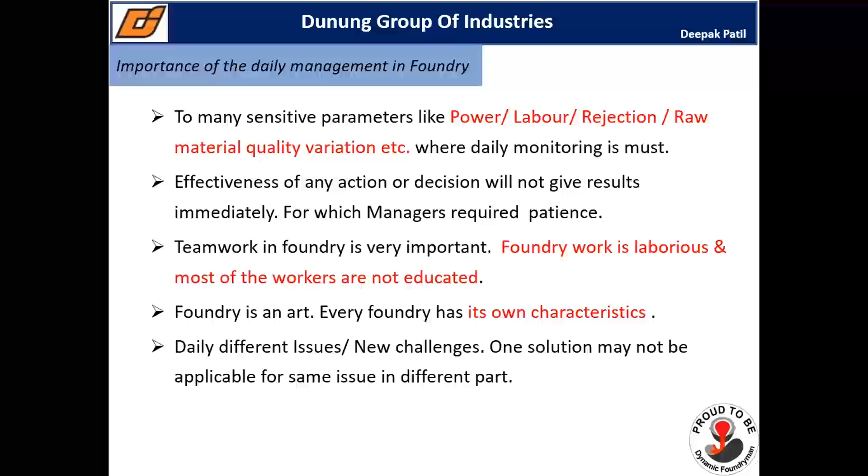From the beginning or foundation of the foundry, it creates its own characteristics, its own systems, which have to be built up on its own. I mean to say that every foundry has to build its own characteristics. It cannot be copy-pasted. And every foundryman knows the different issues or challenges he is going to face every day. Every day is a new day for a foundryman, with new problems and issues that we are going to face in the daily process.

So one of the management criteria is top to bottom and bottom to top. I feel that foundry is bottom to top management, because whatever the skill and whatever the performance of the foundry depends totally on the bottom level management. Bottom level management means the supervisors, engineers, managers.

Whatever the top management skill or performance will not reflect directly in the results, but the capabilities of the bottom level management will show the performance. So this is my perception, that foundry is a bottom to top management. So how to overcome this? We need to understand the small activities, and daily management is the key role in the foundry.

Second part of this, developments and toolings. As we know, for any organization, development activities are very important and crucial. It will build the image of the organization. While talking about foundry development, it includes the pattern, core box, tool developments, because any design issue will impact the overall performance in production. It is going to be run for long production.

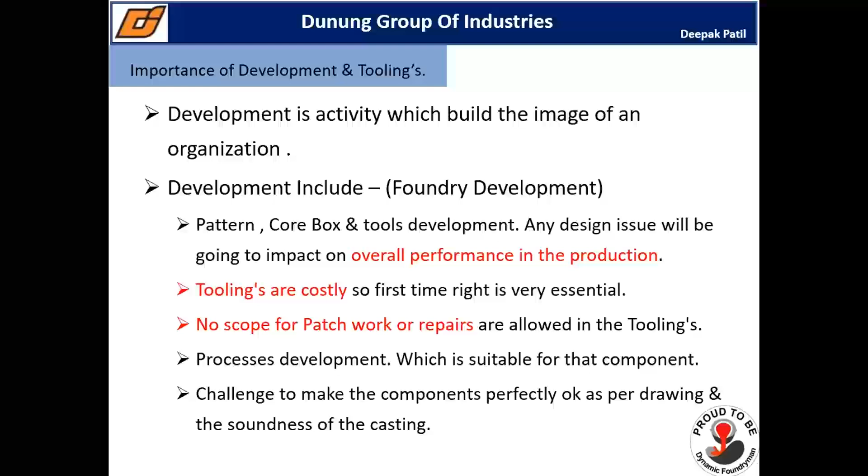So I divided the activities of the development department into 4 categories, and depending upon the organization size and structure, it may vary, there may be additional activities. I divided the development department into 4 activities, and these 4 activities will simultaneously perform their role. Then I will come to the organization structure, how the organization should be.

The first thing is RFQ or new inquiries, that is, request for quotation or new inquiries. These are the inquiries from the customer that the development department needs to study for feasibility with the available plant and machinery. Then product and part development, which includes the manufacturing of patterns and core boxes. Then process development and its documentation.

After manufacturing of the pattern and tooling, one casting sample production is a must. So after manufacturing of the pattern, as a development engineer, we should develop the process and show how the process is proven.

Then after the successful implementation of a sample casting, then the PPAP batch, this product is handed over to the production department. And after this, when all the patterns are working under the production department, the responsibility for maintenance of that tooling lies with the development department.

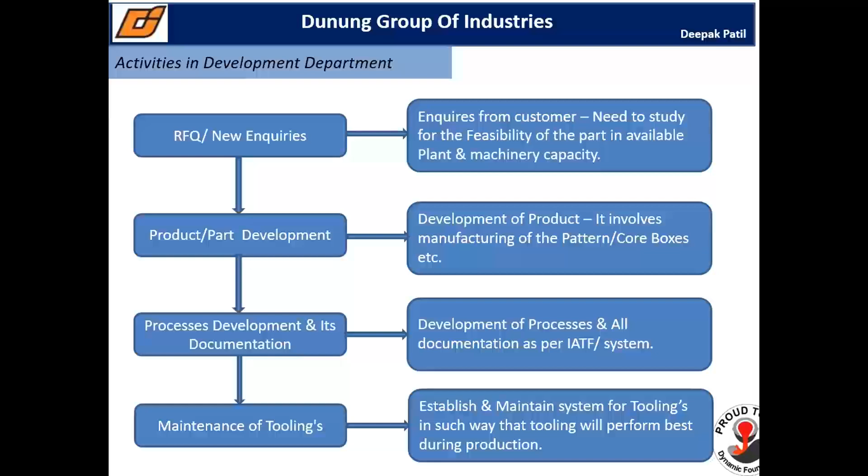I just categorized this in the organization chart. So there is top management, then the development in charge. Under the development in charge, there must be development engineers 1, 2, and that number can be increased. CAD engineers, then an assistant engineer for documentation. Then there is a pattern shop in charge. The pattern shop is a separate department which carries out the day-to-day activity of tooling maintenance, and under him the pattern makers. The number of persons depends on the organization size and the work involved in the organization.

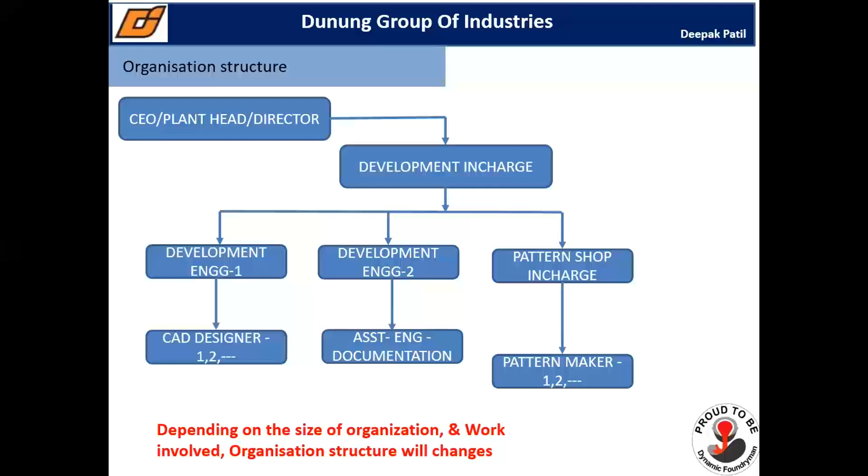Now I come to the roles and responsibility. From here onwards, I will just explain the key points or whatever the roles may be that the head carries on a daily basis or weekly basis to see the development activities perform at their best level. So I will start from the roles of the top management.

These are the general responsibilities, and it is particularly mentioned about the developments. Apart from this, other responsibilities may lie with the management, but this is particular about the development activity. As a top management, the main responsibility is to provide the equipment and resources. But importantly, I want to tell you, the top management must look after the latest version softwares, because nowadays in every foundry we are using the CAD CAM system, then casting simulation software.

So ensure that the software in your foundry is the latest version, and AMC of the software is also important. And whatever machines are required, you need to provide for the pattern shop. Then allocate the proper funds, etc. The main one is weekly monitoring of development progress. Any development activity will be carried out in around 6 to 8 weeks. So weekly monitoring of the development progress is very important.

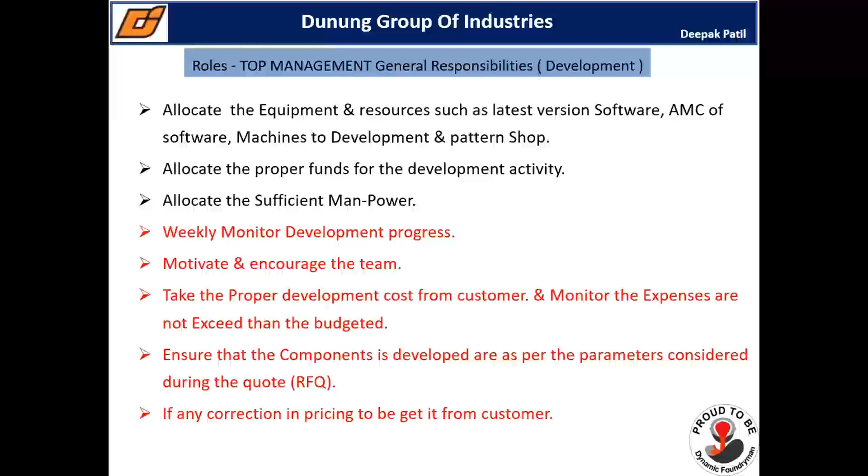Now, the second most important chain is the middle management, that is the development in-charge, managers, assistant managers. These are very key roles for development, because whatever performance or activities get done, they are the responsible persons. These are the general responsibilities I'll jot down here. I will just focus on the red lines, because all other points are very generic. Very importantly, what I feel is: define the role and responsibility of your subordinates. Most of the time in the development department, manpower is available or given, but the activity cannot be measured and calculated on a day basis.

So every day there is a possibility. I'm not saying it will happen like this, but sometimes what happens is every day a new task is given to your development engineer or pattern makers like this. So define his role and responsibility, fix and allocate the work according to his capabilities, and take the reports on a day-to-day basis. What is the performance of that activity or that work?

So this is very important, and stick to their role and responsibility. Do not change the work. Second thing, set the target.

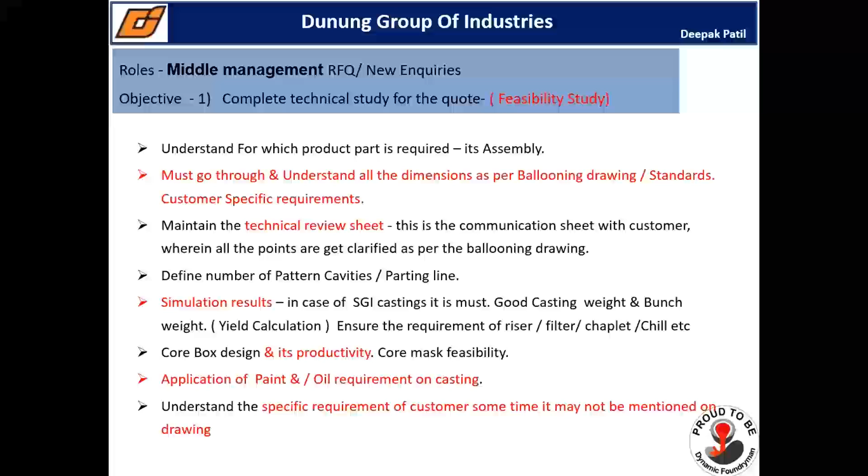And second thing, plan each and every activity time bound. That is the bar chart; jot down the activities and make the complete bar chart, even day wise. And during this, take the commitment or involve the production and all the supportive departments with this plan. This is very important because the molding and all the activities are carried out by production and quality persons. So production involvement is very important.

Conduct the review meeting with the machine shop team and assembly team as well as the customer. While deciding all the patterns, parting line, core box, then risers, gating, feeding system, before the conclusion you should have a joint meeting with the machine shop team, because most of the time there are issues between the machine shop people and foundry people, where we provide the gating, and the machine shop wants their reference point.

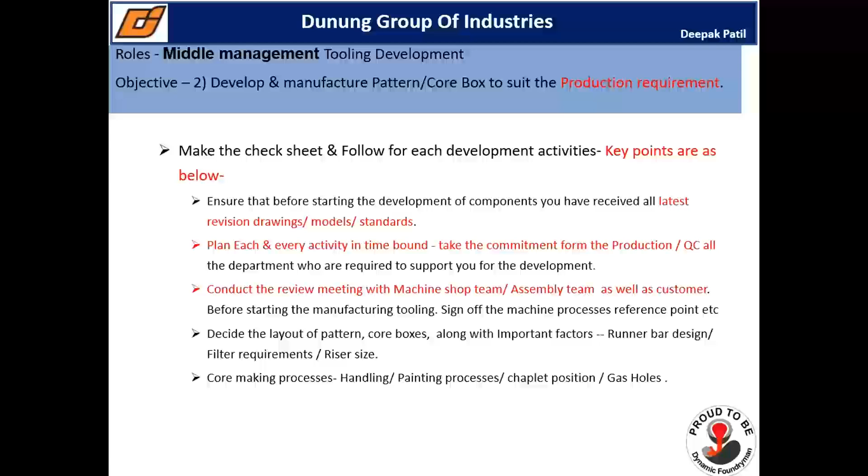I mentioned: define the degating and fettling process. These are the points we miss out, because after pouring, there is the degating. Most of the time, if the gating is not proper, it will not degate with the chipper. Then we have to hammer it. So the degating process and fettling process must be defined. Why am I insisting on fettling?

Nowadays, getting a fettling operator is very difficult, and unnecessarily during the development activities we fettle the job very nicely. We put more hours to complete the few jobs, and after the production we get into trouble. So go to the standard and fettle the job as per the requirement, not excess fettling, to try to finish the activity.

Even after this, define the component packing and delivery process. Although the casting is going to be machined in the foundry in loose condition, define that process, how the casting is going, because a lot of rejection may happen during transportation because of packing and rust issues. So mention how the delivery system of the components works. When you reach that point, there may be a lot of suggestions from your operators and machine shop guys.

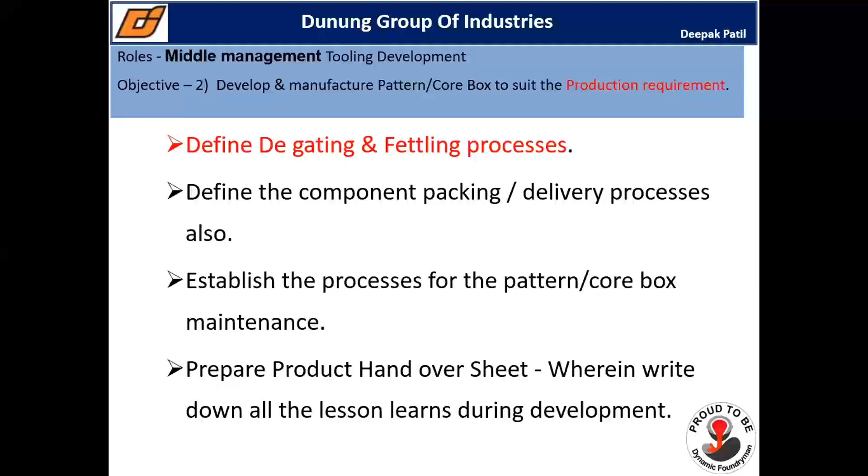Okay, once this pattern activity is over, we will move towards the product and process development, that is, proving of the tool. So once the pattern is ready, you must fill and maintain one trial sheet, where the trial sheet will have all the data of the pattern development, and during each process this sheet is to be used as a checkpoint: whether this tool core box is okay, what issues you faced in the core box. You note down those issues, so that you can take the appropriate action.

And this will be the very standard sheet available, because during the development all the seniors or development engineers involved should observe each and every process. So maintain that trial sheet. It will help you for corrective and preventive action in future. Involve all the departments before producing the first sample. Of course, that

is because generally what happens, pattern ready हो गया, अभी आप लगा दो. Then the production in-charge tells the supervisor, अरे वो भी जल्दबाजी में होता है. Take 5 samples immediately. Always you find that development activities are immediate. अभी करो ऐसा. So please plan that activity well in advance.

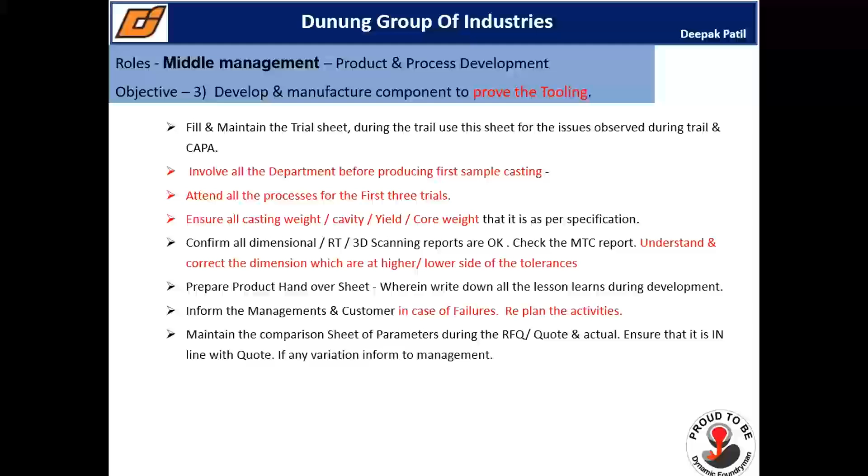Then coming to the tooling maintenance. As you must all be aware, once the pattern is under production, we maintain the history card on a daily basis for the pattern, core box and toolings. What are the production runs? First of all, you maintain the history card. So whatever actions are being taken to reduce the rejection, or issues faced during the production, you have to mention on that. Mention it very properly

with some kind of format you should have: when the defect happened, why it is a defect, because from this you have to take the lessons learned and try to improve in our next development. Maintain a stock of the loose pieces in the pattern, depending upon the cost. It is very essential that you have spares, because missing any loose piece will impact the production.

Then monitor the tool life plan of the new tooling in advance. During regular maintenance, before the pattern goes to production, you have to check all the runner bars. Runner bars are in place, vents are in place. There is no loose runner bar or loose pattern. The pattern is not out of the parting line. Apart from this, you should clean all the air vents on the match plate, which is very important, especially in the high pressure molding line.

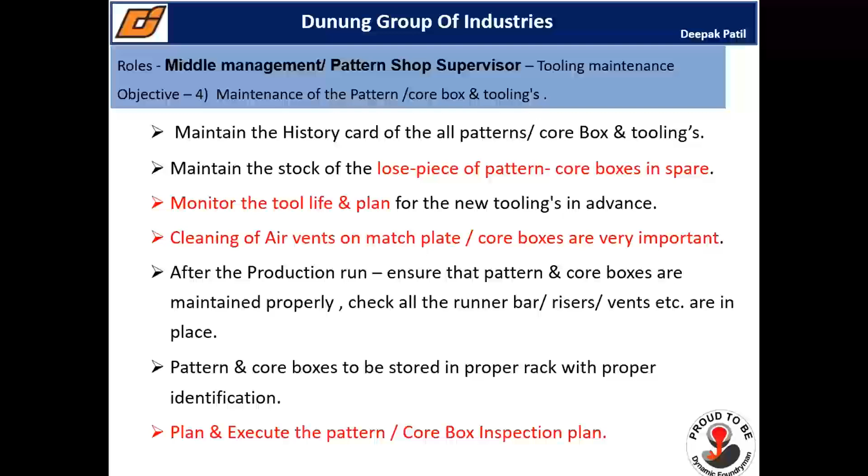So for tool maintenance, display the daily work plan board so that the worker and pattern maker have a very proper visual aspect. Then maintain the pattern and core box rack, ensure the proper display of the workstation, and maintain a healthy environment around the workplace. And one of the important things is: do not change the work plan frequently.

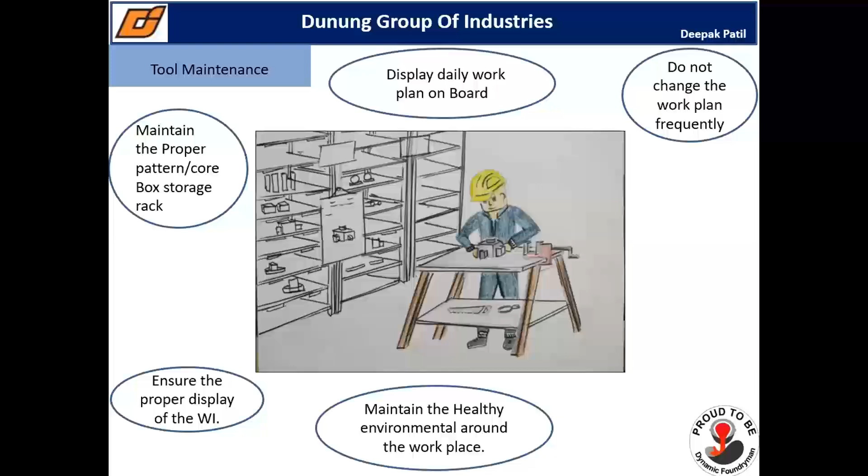These are some of the CAD operator responsibilities. Whatever I explained in middle management, he is supporting. Then I have added some more points: prepare and maintain the standard data. Standard data is required for the risers, sleeves, whatever their modulus. Our calculations must be ready and available with him.

One of the most important tasks of the CAD operator is to maintain the files, drawings and 3D model standards separately and ensure that the latest revisions are available in the system. Because they are stored in soft form, we need to develop some code or password lock, in such a manner that all the latest revision drawings of the components as well as the patterns are kept properly and all the old models are discarded properly. That he has to ensure.

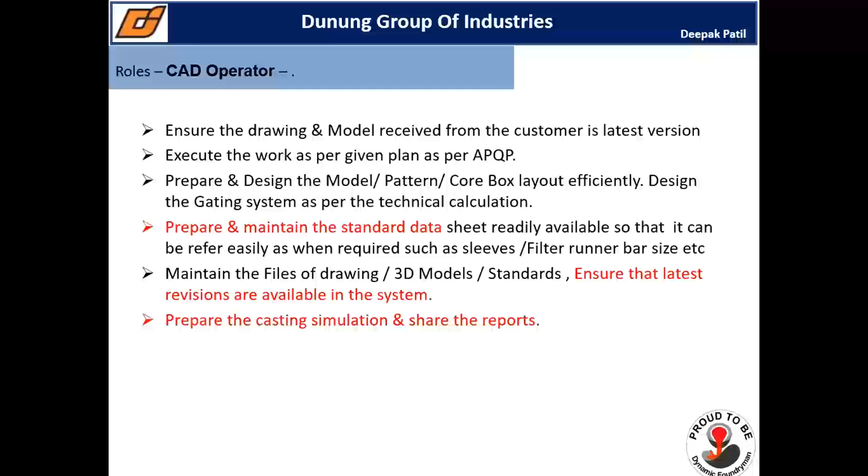Then preparing the casting simulation and sharing the reports is one of the responsibilities of CAD operators. Then design the model, then preparation of the model. These are the CAD operator's responsibilities. The development engineer is responsible for specific development activities. These all are working under the manager, so they are focused on a specific task.

The development engineers can be divided customer-wise. If a foundry has 4 to 5 customers, then one development engineer follows one customer, so that he will be very comfortable with that development. The customer is also happy that one person is looking after him. So prepare a specific bar chart and timeline plan to complete the task.

There are a few hints that I want to give you. For development engineers, if a project needs to be completed within the timeline plan, then we need very smart working. A normal answer from the pattern makers is, "The pattern's casting got rejected." This will give you another 8 days on the time frame. So initiate the activity very strongly. Go to the pattern makers. Observe each and every activity. You should have the command to drive the team and get it done on time.

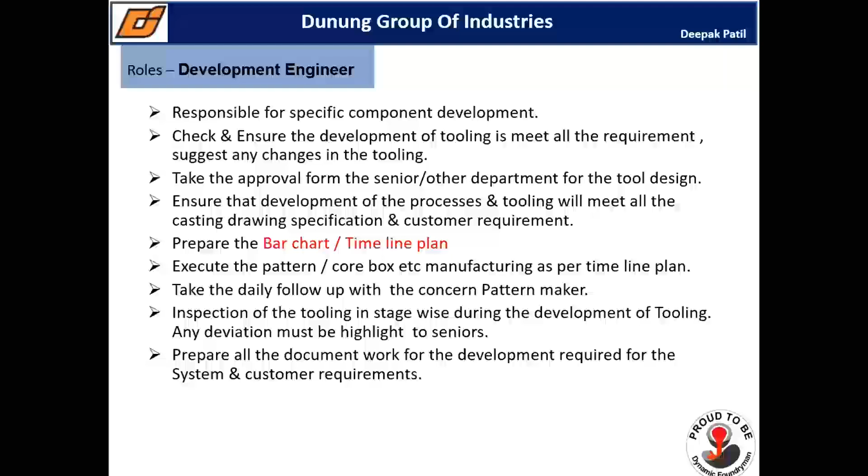So these are some common management techniques that develop a healthy environment in the organization. In any crisis or failure, keep your mind cool and calm. Do not hesitate to take help from colleagues and consultants. If you're stuck on some issues, because in the development stage sometimes everybody, I have also faced this, some components we take for development don't go as expected, and it takes a much longer time to succeed. At that time, take help from colleagues and consultants.

Any small mistake can lead to a big mess, but also remember any small correction or suggestion can lead to a complete change in the situation. So keep your morale up and take corrective action in a proper way. You will get the result correctly. And this is very important for anyone working in the development department: develop good relations in the foundry so that you will get all the service support during development.

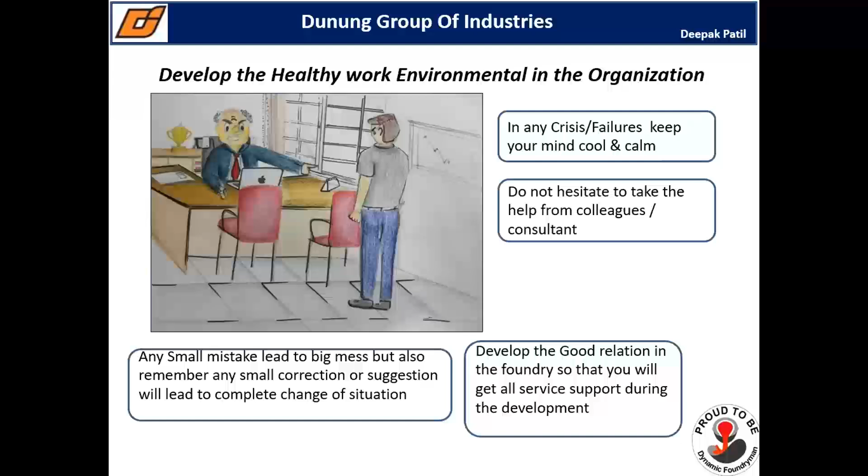This is a very crucial part in every foundry, because the production people are given daily tasks to complete the dispatches and everything. During this, the development activities may get delayed and no one looks after them. But you have to get it done very properly. So maintain good relations so that you will get the work done very fast. Teamwork is very important in a foundry. Through group discussion and brainstorming, we resolve all chronic issues and find the best solution.